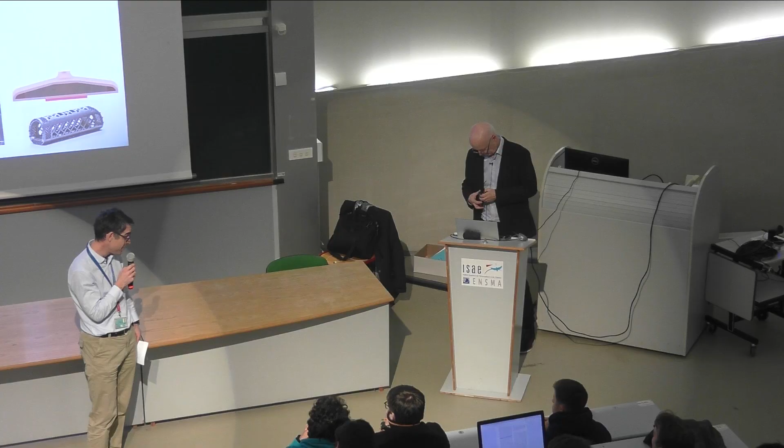As Maggie said, this is the second conference we have in English. The first one was organized by someone also in this community of high temperature materials working at GE Additive and now Colibrium. And first of all, I'd like to introduce Professor Roger Reed.

So Roger Reed did a PhD on steels at the University of Cambridge with Professor Bhadeshia, who is very famous in that field. And then he has been appointed at Imperial College before moving to the University of Cambridge as an associate professor. And then he left for 4 years to the University of British Columbia in Vancouver, came back in UK as a full professor in Cambridge again, then moved to Birmingham as a professor, and then to

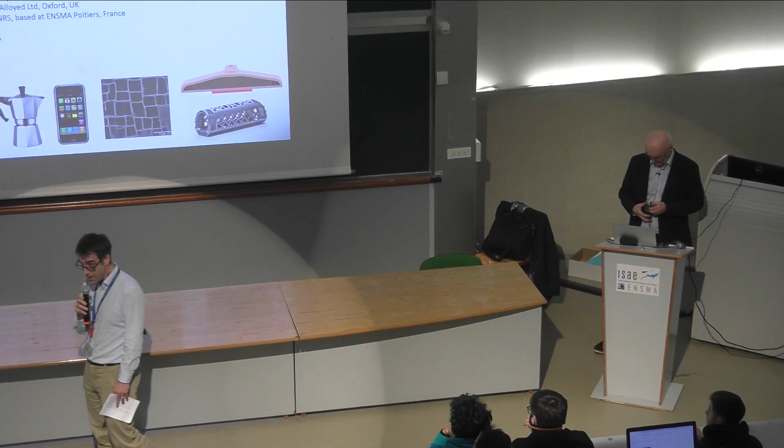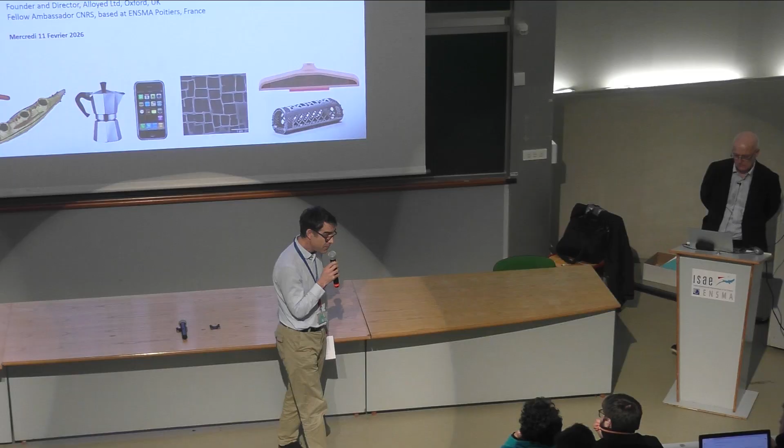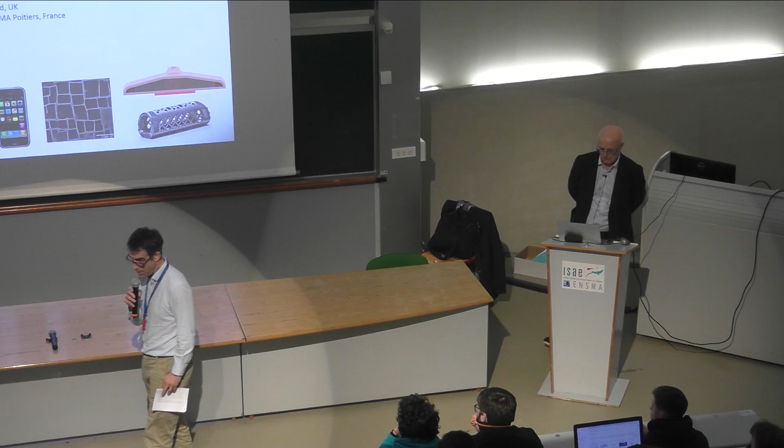Oxford. And more importantly, he has been appointed as a fellow of the Royal Academy of Engineering in 2017. And since 2023, he is also the chief officer of the high temperature laboratory in the University of Birmingham. So it means that he has a joint appointment between the University of Oxford and the University of Birmingham.

And last but not least, recently Professor Roger Reed has been elected as the CNRS Fellow Ambassador attached to our group at ENSMA, for the next 2.5 years. So it's a great honor, very few of them. If you look at the CNRS Fellow Ambassadors, some of them have received a Nobel Prize, just to tell you the importance of such a prize. So it's a great privilege.

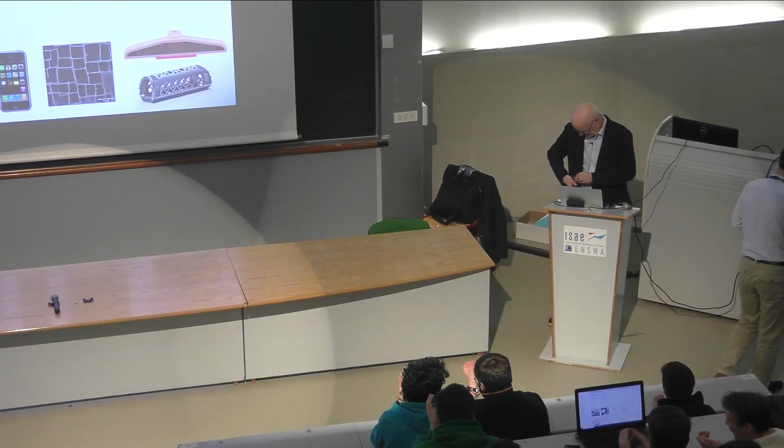So it's a great pleasure to be here, and seeing so many young people makes me very jealous, because I used to be young once, and I'm not young anymore. I used to be the future, but the future is you. So hopefully I can try to inspire you a little bit about this field today. So thank you, Jonathan, for the very nice introduction, and I hope you can hear me. Actually, I was warned that the acoustics in your beautiful theatre is very good. So if you whisper at the back, apparently I can hear you down here. So please be very careful at the back.

Okay, so just some biographical details, and the main point I want to get across here actually is that we in the universities need to collaborate very strongly with the big companies in this field, because we don't make jet engines or space rockets and so forth. So having the collaboration with big companies such as Safran, Siemens and Rolls-Royce, and also the material suppliers you can see listed here, is very important.

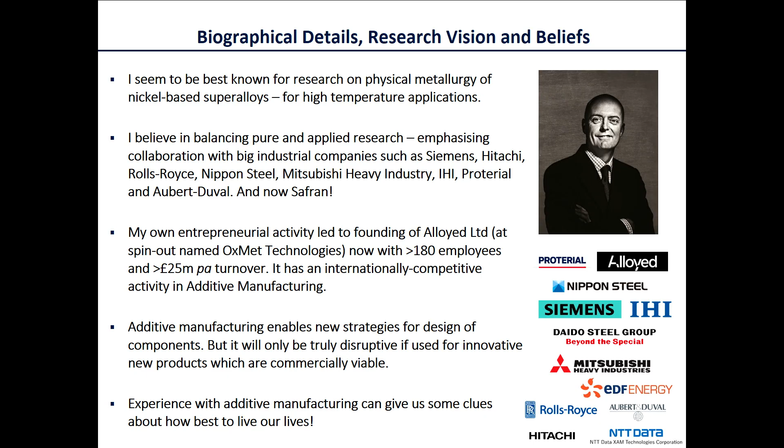And so people like Professor Cormier and others are making giant efforts to work with those companies and to collaborate with them. Sometimes we also have to be a bit entrepreneurial, which means that we have to think about setting up our own company where there is space for doing this. I set up about 10 years ago a company to do work specifically in the area of additive manufacturing, what we call 3D printing. So I'll say something about this in my talk as well.

So this slide here tries to inspire you to think about metallurgy, and really you can see here that it underpins nearly all aspects of commercial enterprise, energy production, conversion, and so forth. And so you can see here I make some claims about the fraction of all of the manufacturing inputs or values in Europe; it's a very significant amount of money.

And of course, all of the people around the world seek economic growth. And it seems to me that one of the big challenges is to find new kinds of metallic products that can allow this economic growth to occur, because we really want to have prosperity in the world. But yet we also have a problem because the production of metals contributes in many ways to global energy consumption. A lot of metals and minerals are being mined, which can, of course, lead to waste products.

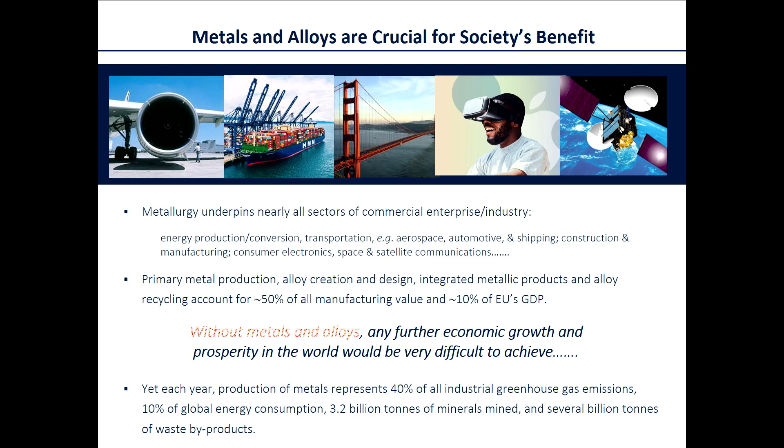Of course, this is another side of the story, which I don't really have time to talk about today, but it shouldn't be forgotten about when we talk about this field.

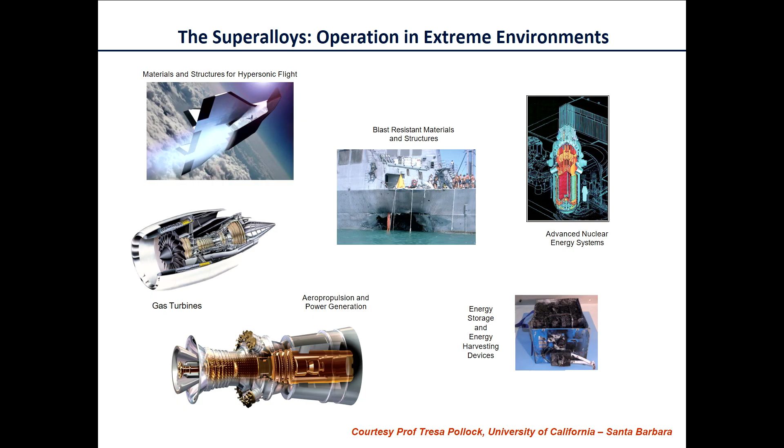The overarching questions in my career that have really motivated me concern, of course, the superalloys, which you can see are at the back of the engine here, at the very hottest part in the combustion chamber and beyond the back of the engine. And what we have to try to think about is designing alloys that can work well in those environments.

I've also been quite concerned with trying to find good manufacturing processes to put these components into practice, particularly using numerical modeling. When I started my career 30 years ago, we had very, very small computers, and I remember having only about 1 megabyte of memory on my PC to do all of my work. And it was really difficult to swap the memory in and out of what I had available.

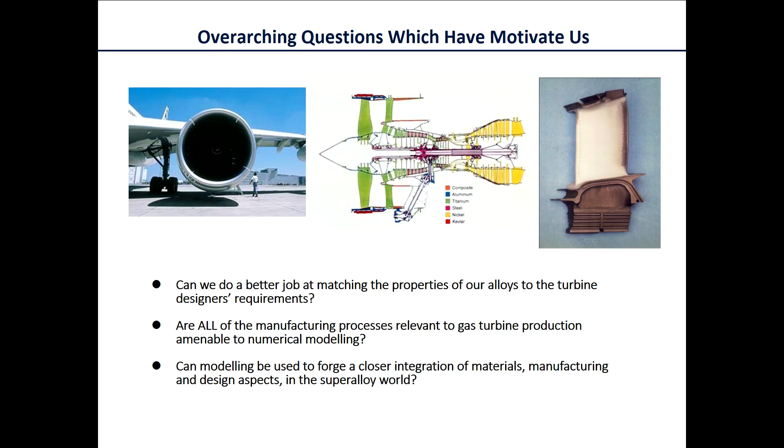But I'll try to show you that it's been possible to model many of the manufacturing processes. And of course, what is also happening is that we're trying to find a way to integrate the materials aspects, the manufacturing and the design in this world.

And so you can see here that just from a simple thought experiment, it's not easy to optimize these materials by trial and error. We need to have some kind of analysis method to optimize the materials. So I'm going to try to say something about that also in my lecture today.

But I'm going to start by telling you about some of the manufacturing processes which are used for these sorts of materials. I understand that not all of you are manufacturing engineers, but often we cast these materials into single crystal form, and this is done typically using a seed and a grain selector here, a helical selector. And then we have a ceramic mold which is withdrawn gradually from a furnace here.

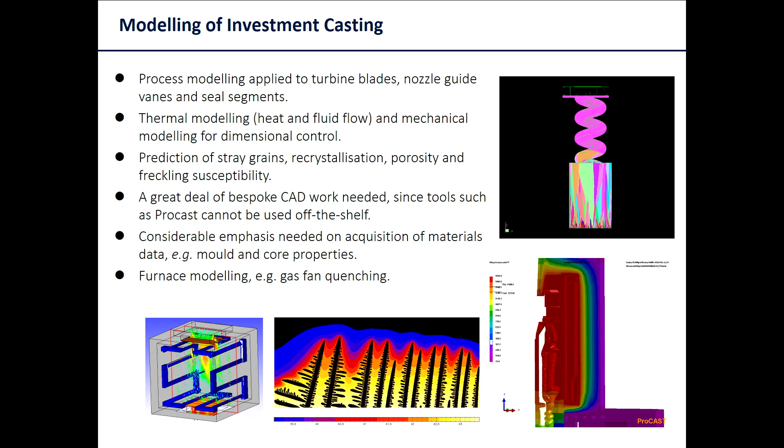We have a dendritic structure which is grown, and typically we also need to heat treat the material after it's been cast. So these are examples of computer models designed by my group over many years, but specifically with the idea of trying to make a digital twin for this sort of process.

Here's another example. We have turbine discs in the engine. Typically they are very heavy, maybe 100 kilograms in size. They're spinning around at maybe 10,000 revolutions per minute. Very big centrifugal stresses are set up. We have to machine these parts in a very intricate way from large pieces of metal.

And you can see here that the residual stress fields, which are typically inherited from the quenching operations, have a habit of redistributing as the material is machined away. So we were concerned with trying to understand how that residual stress field is redistributed as the material is chipped away.

And the reason why that's important is that those residual stress fields have to be accounted for in the lifing process for these components. They have to be taken account of in the estimate of the safe working life of the component. So precisely how we machine away the material becomes very important on the factory floor.

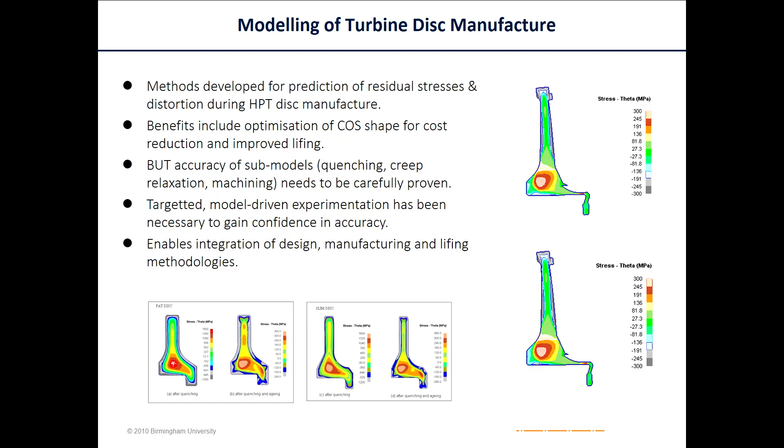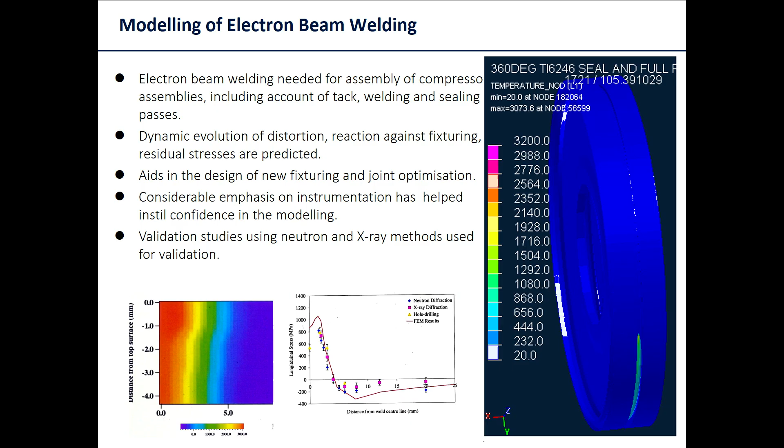Here's another example. These are compressor assemblies which contain the compressor blades, which allow the air to get squashed in the engine. And these are typically welded together. And of course, the action of the heat source, here an electron beam, as it passes around the disk, breaks the symmetry of the operation. So the stresses and the distortions which happen in that manufacturing process using electron beams have to be accounted for, because we want to have the distortion captured.

Here's another example. We want to try to find new ways of designing discs and blades because, of course, we want to minimize weight. Traditionally, the industry has made very widespread usage of these so-called dovetail joints where we mechanically fixture the blade into the disc. This, of course, requires us to optimize for the metal around the dovetail joint, which can be very heavy. So you can see here that there's a lot of metal at the hub of the disc, which, of course, contributes to the weight of the structure.

So we try here to invent new kinds of friction processes involving rubbing together metal, making a friction joint, which allows us to build lightweight structures for these sorts of applications.

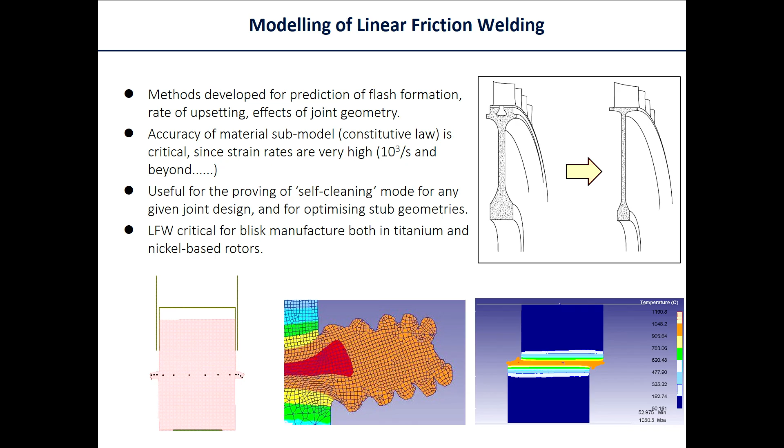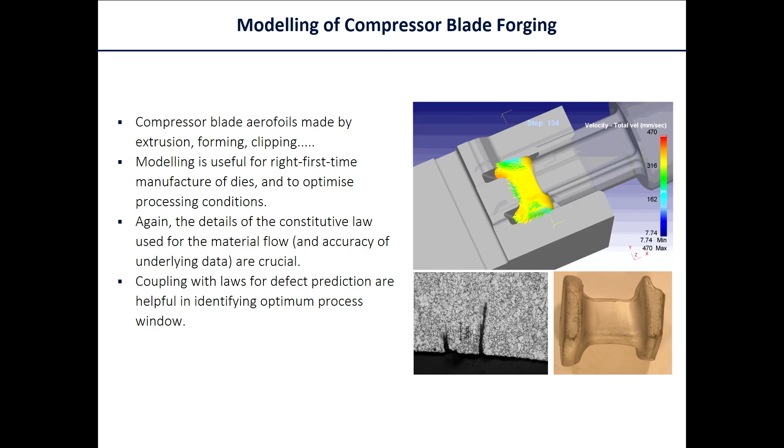Forging is also important in this field. So if you think about metal, we often want to form it into a particular shape. Here's an example of a preform for a compressor blade being made by pressing it into a die. Here, there is a risk of thermomechanical forces leading to cracking, and we want to anticipate in manufacturing whether this kind of thing can occur so that we can try very hard to avoid it.

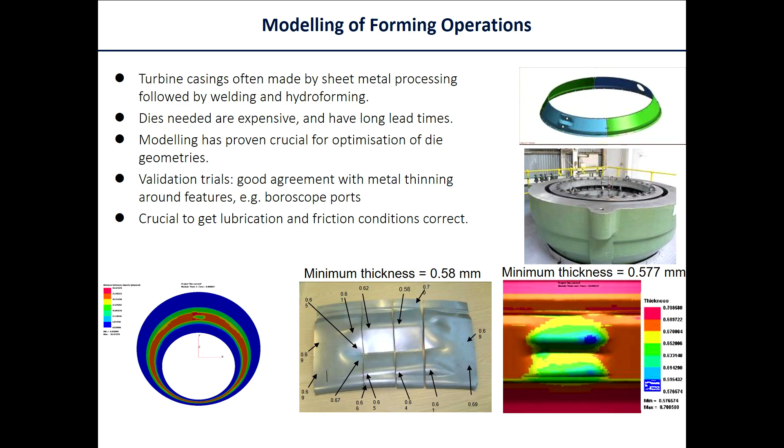We often have sheet metal forming processes too. These can be very expensive in terms of not just money, but also in terms of the time scale associated with designing the dies. In this industry, typically you may have to wait between 6 months and 12 months for the delivery of a new die, which has to be very carefully machined. And we want to try to avoid many trial and error iterations and get to a right first time philosophy for this kind of stamping operation.

Okay, so I hope in the first part of my lecture there I've given you a flavor for the kind of materials and also the kind of manufacturing processes which are used in this kind of industry. I'm working most of the time at the University of Oxford, and in my laboratory at that university we emphasize 4 key pillars of research.

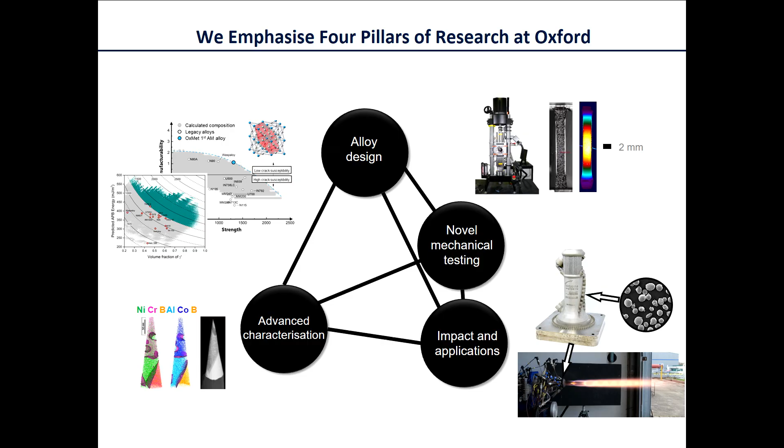We like to do advanced characterization. We try to design new alloys. We try to come up with novel methods for testing, particularly the mechanical performance of these materials. Very similar to the work which is going on in ENSMA, if I must say, at a much higher level and with greater impact. Then, of course, we're always interested in applications in this field. We want to try to find ways to make our research impactful.

Here's one example. In my experience, it's really important to work closely with companies, but also to have good concepts. Here's a nice example of a collaboration we have had over many years with the Siemens company. The Siemens company is one of the biggest companies for making land-based turbine systems for power generation, typically building machines generating maybe 50 megawatts of power.

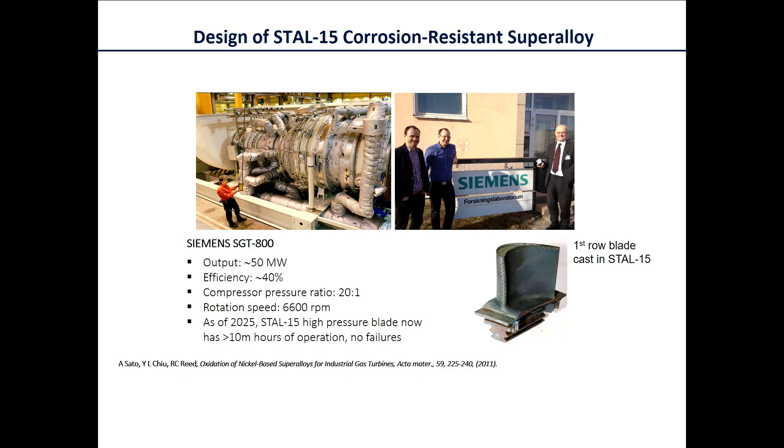And typically in this field here, these single crystal materials tend to corrode very rapidly at high temperatures. So the temperature of the hot gas may be as high as maybe 1500 Kelvin, maybe even up to 2000 Kelvin in some advanced aero engines. And so there's a risk, of course, that the blades here will corrode over time.

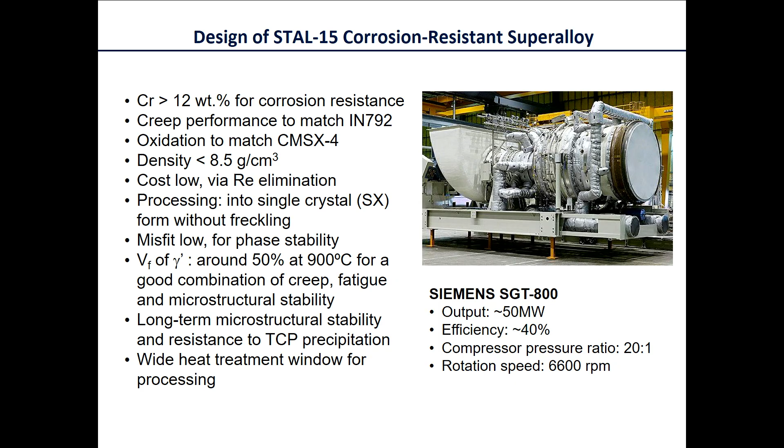And so we had an idea here of trying to invent a new type of material that would have superior corrosion resistance. The idea actually was to try to come up with a kind of stainless version of the superalloys. And the idea here was to have a chromium content equivalent to that of a stainless steel, greater than about maybe 12% by weight, so that we would have some very good corrosion resistance.

Now, this is a composition that we ended up designing here, but the key point of this analysis was to realize that the two phases which are really relevant to these materials, the gamma matrix and the gamma prime precipitating phase, have got different propensities for dissolving chromium. So by modifying the amount of the gamma prime forming phase, we were able to push up the net chromium content of the alloy towards higher levels. And in this particular case, it was this concept which is really important.

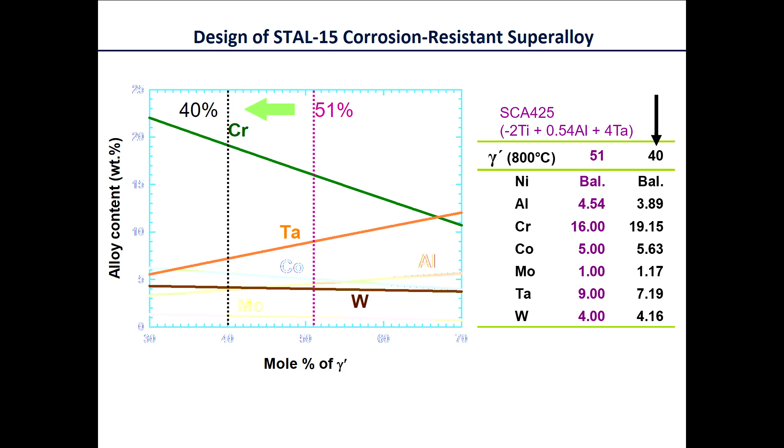And that's why I actually like collaborating with the French people. You have very strong concepts, very strong flair for design. And this is the key point that came from this particular research.

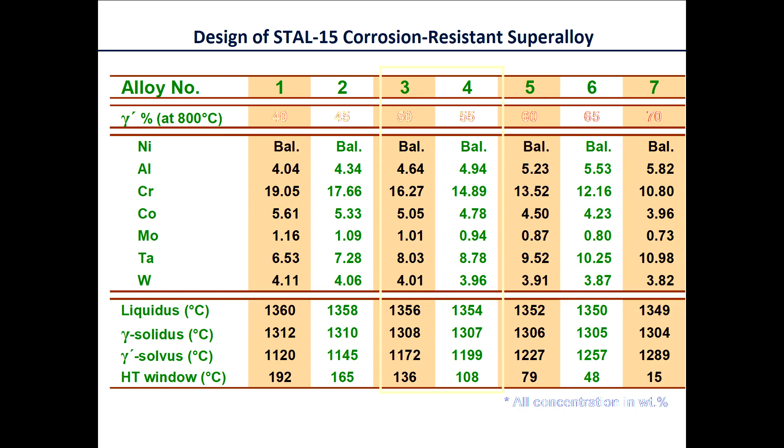And you can see here, taken from maybe 15 years ago, different trial compositions that we came up with on the computer with this idea of the digital twin, modifying the fraction of the phase and its compositions predicted by our thermodynamic databases.

And you can also see here from so-called thermogravimetric oxidation tests that this new alloy, which had the code name STAL15, STAL stands for Siemens turbine alloy, has very good performance in oxidation. So under mass gain trials at temperature, you can see it has very low rate of mass gain because its oxidation reaction is very, very slow.

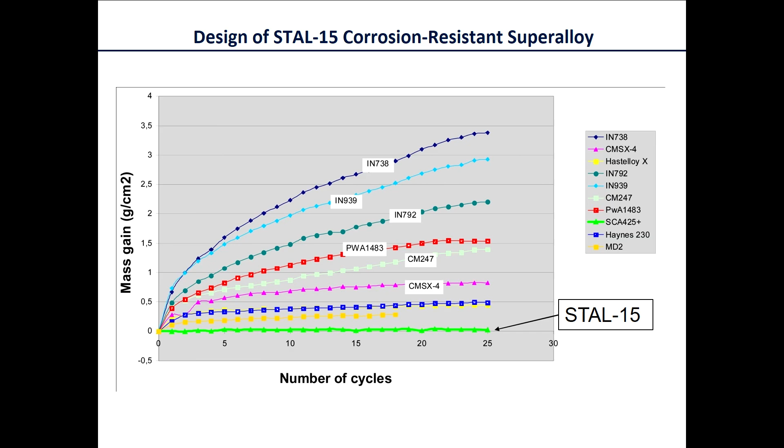Sometimes when we do these kind of projects, one of the beautiful things about science is that many, many things arise which we didn't really think were going to happen. So I can say with great confidence that we have been able to come up with really novel science too.

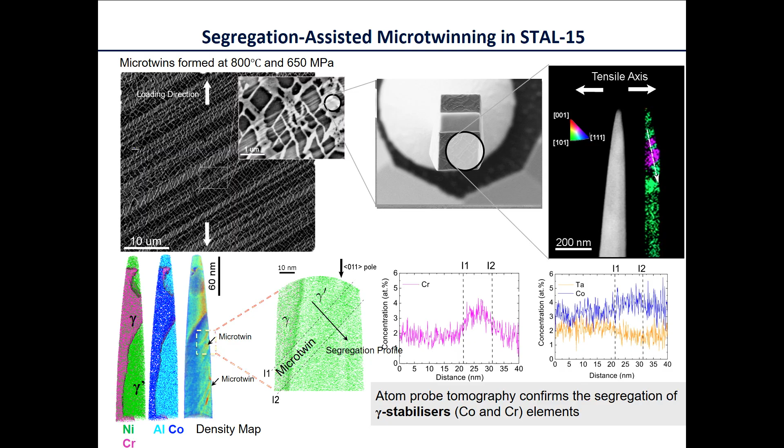These are microstructures of the deformation characteristics of this new alloy, in which we found a very special kind of twinning mechanism here, which involved us needing to take needles of the material and then stripping off the ions one by one to identify atom probe maps here, which we could then interpret for evidence of this so-called micro-twinning. I'll say more about this very neat technique later on in my presentation.

Now, around about this time, when we were doing this work, we had the idea of trying to build large databases of conceptual chemistries of these materials and to relate each of those chemistries to the properties of the alloy. Bear in mind that conventionally, up until that point, people had been, by trial and error, so-called bucket chemistry, inventing new alloys, testing the properties and ranking them to see which was best.

We decided we wanted to try to do better than this, and that process involved making many, many calculations on the computer and identifying these kind of ISO fronts here, which will allow us to optimize the composition of the alloy based on merit indices and design criteria to eliminate unsuitable compositions.

This was a really nice thing which we did, I think, in retrospect, and we termed this method an alloys by design approach, because we wanted to be able to design alloys for their properties in just the same way, for example, that polymer chemists are able to design new kinds of polymer materials on the computer quite routinely.

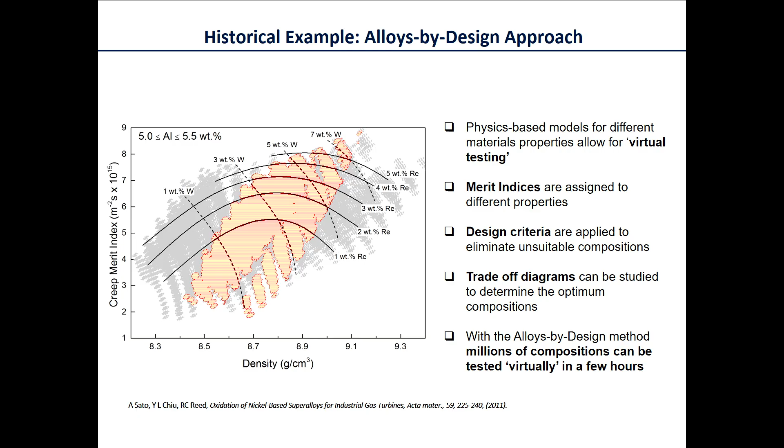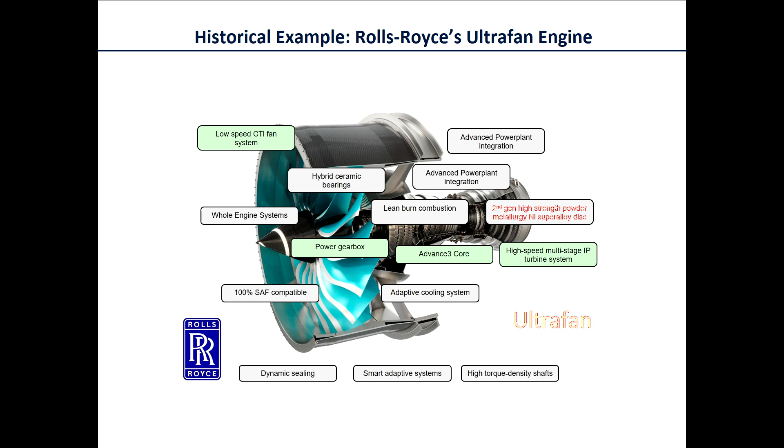And you can see the kind of technologies, I won't read them all out, that they believe to be important for a next generation UltraFan engine. And at the back here, you can see a new second generation high strength powder metallurgy disc that was designed by my group, and again, patented, as these things have to be.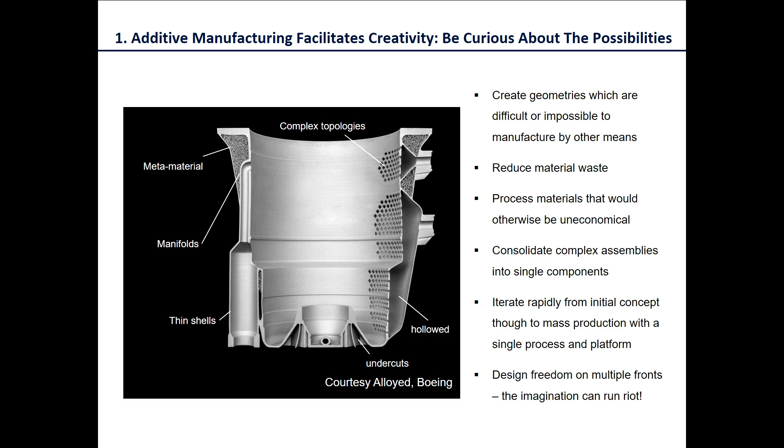Yes, so for those of you who maybe are unaware about what additive manufacturing involves, we have a powder, and we spread this onto a base here. Then we use a laser beam to locally write the structure that we need to have in solid metal. Then we repeat that process over and over again. Typically, the thickness is about that of a human hair, maybe about 50 microns.

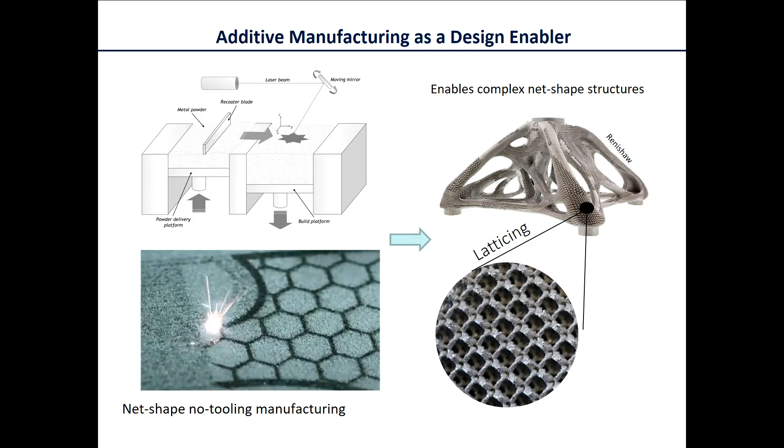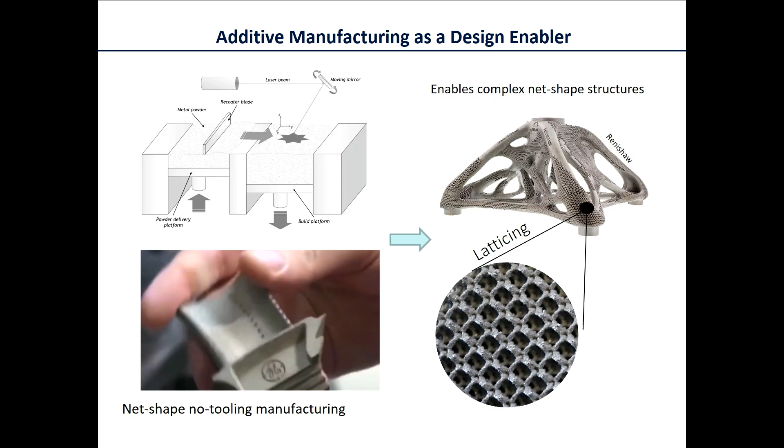And providing we have an accurate digital file that we start with, and we know where to place the laser beam, and we can make good decisions about that, we can build up these very complicated structures here by solidifying the metal locally using the laser beam. So that's what additive manufacturing actually is. And what this taught me is just think about what the possibilities are. While you're out walking or running or cycling, whatever you are doing, open your eyes and just think about what we could do with new sorts of structures.

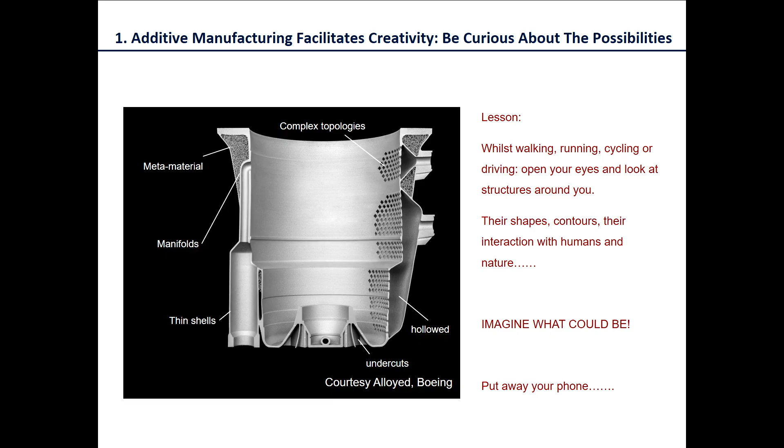What this has taught me actually is that design is very, very important. So how we integrate structure, properties, modeling, and processing is very, very important. Now, I work most of the time actually at the University of Oxford, and we have some pretty clever students, but actually they're not really as clever as the people in France, I've discovered. I have this kind of thing in England about trying to ask people what they think they mean by design.

And I usually start by asking, is the word design a verb? En français, un verbe? Oui? Comme ça? Oui? Or a noun? Now I show my ignorance of French. What is the French word for noun? It's the same thing, the même chose. Oui. Maybe I do know French after all. So is it a noun or a verb? And the answer actually is both. It's both. This is maybe the origin of the confusion, right?

Because we have design indicating a concept, as in good design, functional, beautiful, so forth. What I think is the most important aspect, though, is actually doing design. And doing is un verbe, en français. And so we can think about the action of doing verbs. But then we also have to think about design meaning a concept, meaning a kind of prototype. Sometimes we are using the word design to mean this.

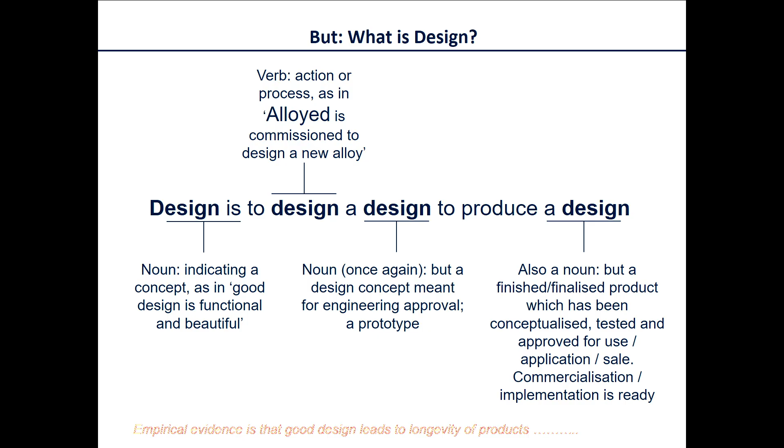But then lastly, also, we can think about design meaning a final product, which has been designed, it's gone through the prototyping phase, and we have a final product that we can sell to the market. So we say design is to design a design to produce a design. And this is here really to make you think about what we know to be design. And of course, what you realize if you think about design is that good designs really are long-lasting.

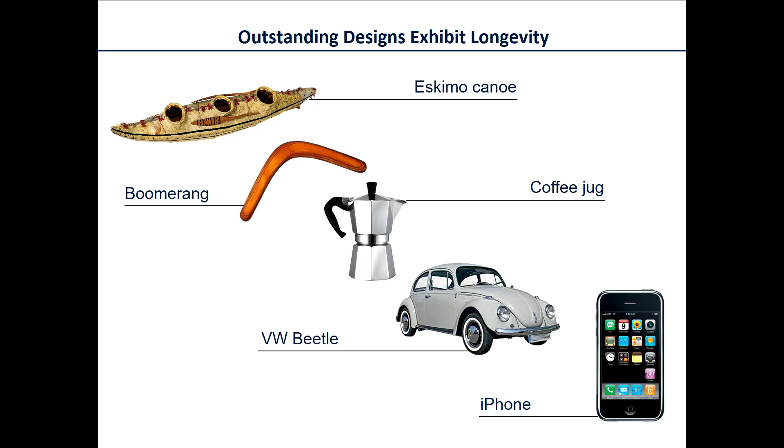So for example, the concept of a canoe or a kayak, the basic design hasn't changed for thousands and thousands of years. The boomerang, again, a good design. This kind of coffee jug, you can still buy these sorts of things. They're nice. This basic structure is the same. And even the iPhone that I implore you to put away, basic design hasn't changed for about, I think, 20 years maybe, which is an amazing thing. You know, in the world of consumer electronics, a basic design that hasn't changed much.

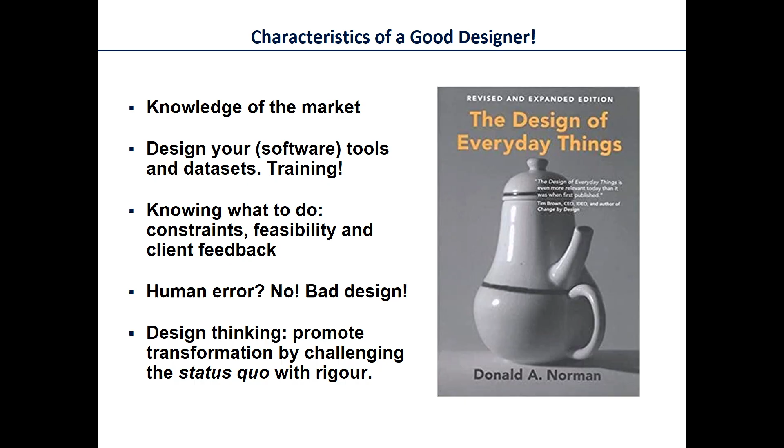So think about being a good designer, knowledge of your market, designing your software tools. Think about human error. Well, is it human error or is it just bad design? I like to promote design thinking, and these books here are ones which have really influenced me in reading them. So I thoroughly recommend these.

Okay, so a second concept for you to think about: I think finding ways to improve your observational capacity, or your spatial resolution, or the depth of field for your measurements. In my career, this has been very important.

Here's some example. We think about how to test the material here by a test piece. Does this really have to conform to a standard? Or do we in a lab maybe want to try to change the design? Or do we want to maybe think about moving from a classical extensometer to a vision-based system? Maybe we need to measure the temperature not just with a thermocouple, but maybe also with an infrared camera.

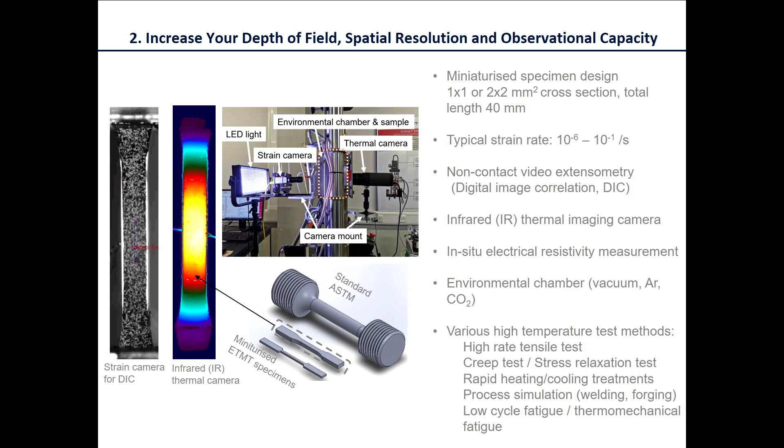There's these days lots and lots of ways that we can find and store digital data about the way our materials behave. Here's one example. Don't be afraid to try to do things differently. Here we had the idea of building a brand new furnace with windows that would allow us to have access to the specimen, but from many, many different sides.

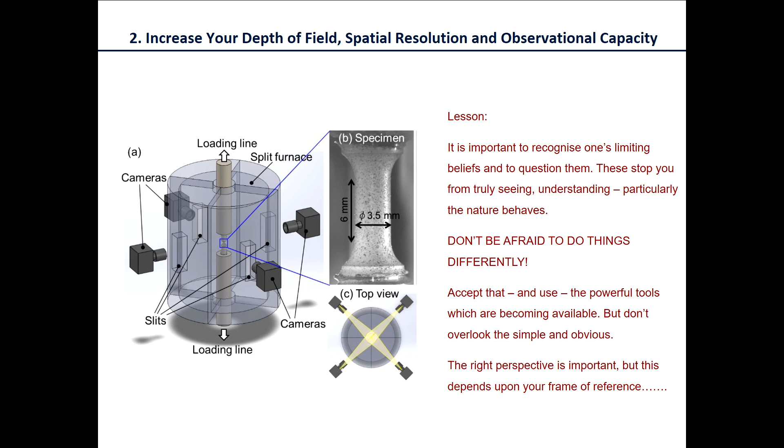Because some of these materials are deforming anisotropically, which means that they tend to move out of plane. And we wanted to have a much better map of what the surface is doing. Here, the perspective ended up being very, very important. And you can see here that when we test the material from 4 different angles, or we measure the deformation, the perspective that we have here is very different depending on which camera we use, even though it's exactly the same test.

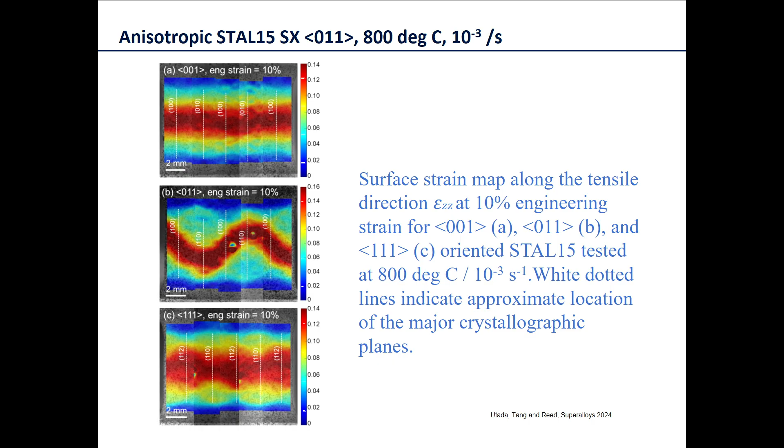So what this teaches me anyway is that the perspective depends very much upon your vantage point. And you can see from these sorts of measurements that we were able to map the surface strains as a function of the circumference of the material for different orientations of this particular material. And I credit Mr. Utada, who worked very nicely in Jonathan's lab for these very excellent measurements in Oxford.

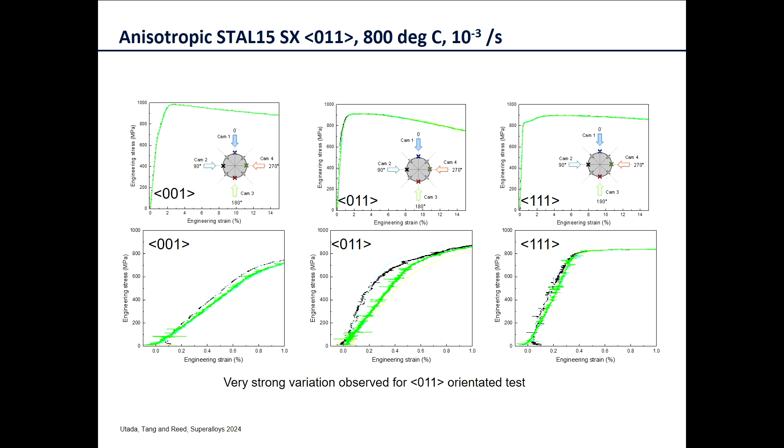And you can see here that actually the stress-strain behavior in the limit here is very much dependent upon the camera that we use. And this is due to the elastic and the plastic anisotropy of this material and its underlying deformation mechanisms.

Here's another example fresh off of the press. I think these measurements were only made last week in my laboratory. You can see here that this is a stress-strain curve. This is actually a rectangular cross-section. And with the camera-based systems, you can see the strain here. You can actually see the strain banding. I'll show it again. You can see here the strain banding occurring in this material over time.

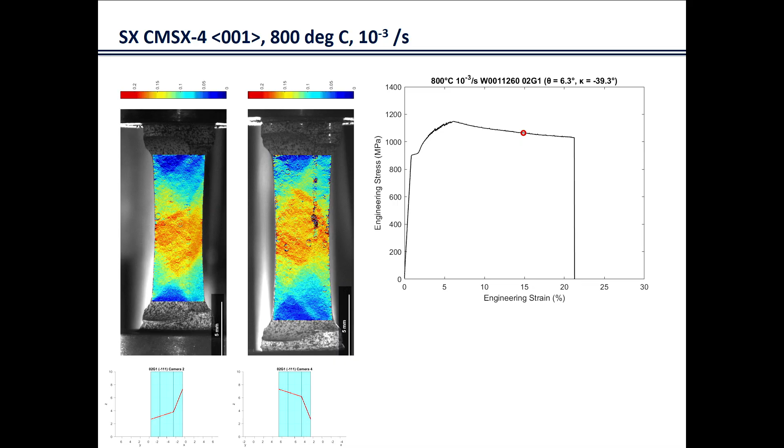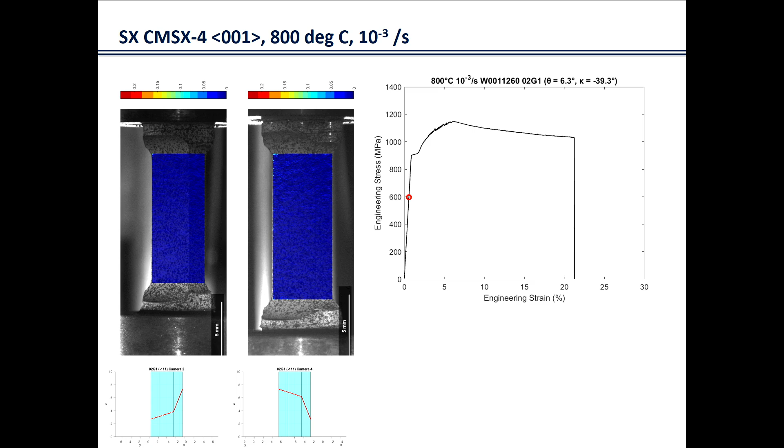So the plastic deformation is clearly not isotropic. There are certain planes on which this material actually is deforming preferentially. So we're able now, I think, in this field to capture a lot more data. And how you young people deal with this data for calibrating and building new kinds of models with greater fidelity, I predict these things are going to be very important moving forward.

Now, I said to you that we had placed emphasis on designing new kinds of materials for the additive manufacturing process. And here's some justification why this is important. If you look at this field, then in the 1950s, history tells you that we learned how to cast these materials in a vacuum. That was very important because they're very reactive, of course. So vacuum systems came along. We learned how to atomize the powder and then consolidate it. And then in the mid-1990s, additive manufacturing came along. Every time these new processes have come along, new kinds of alloy have been invented.

So there's a kind of lesson here in life. I hope you don't mind me trying to impart some of my feelings about this. What I have discovered in my life is that it's very critical to decide where and when to start a new piece of work. You can be late, you can be early, but getting it right in terms of its time is very important. We always need to be inspired or to be excited, to be creative. It could just be personal work, your own kind of way of doing things. It could be a patent. You need to write a paper at the right kind of time.

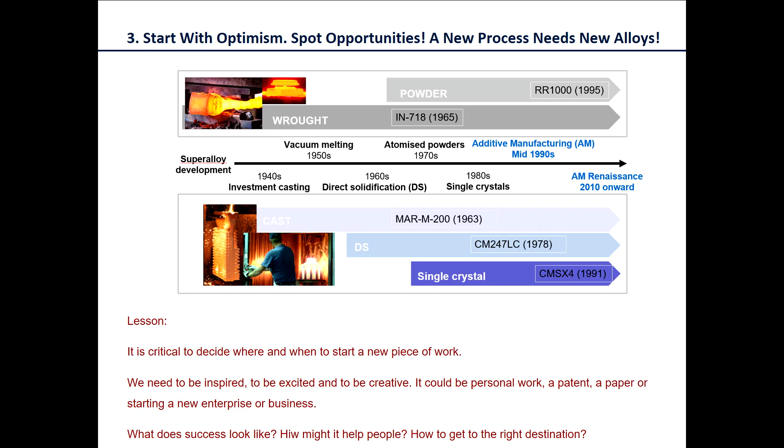Think about, what does success look like? Finishing your slide today and showing it to me before I go home, right? Please do it. How to get to the right destination.

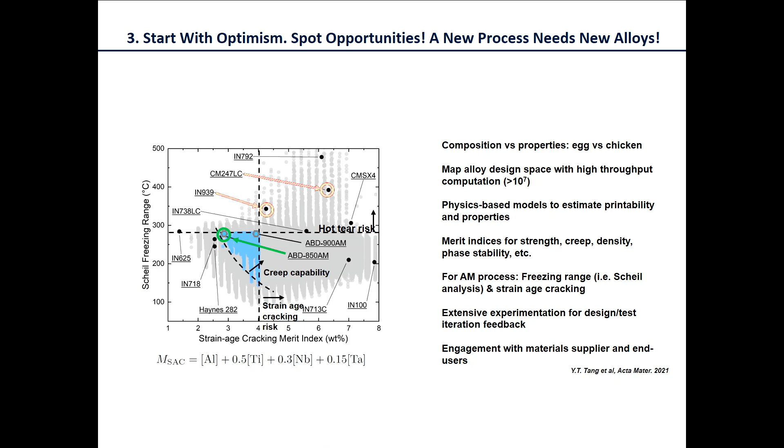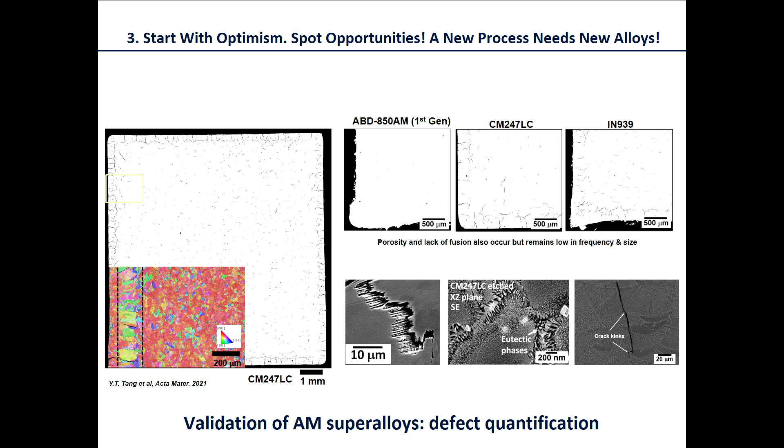And Professor Tang did this work for his PhD and postdoctoral work. And you can see from these slides here, these are typical coupons for additive manufacturing material. This is the first generation alloy that we designed. And you can see here, right first time with these concepts, we were able to design something that actually performs better under identical tests than the existing alloys, which do crack under these circumstances. So this gave us great confidence in what we were doing with regard to designing new kinds of materials.

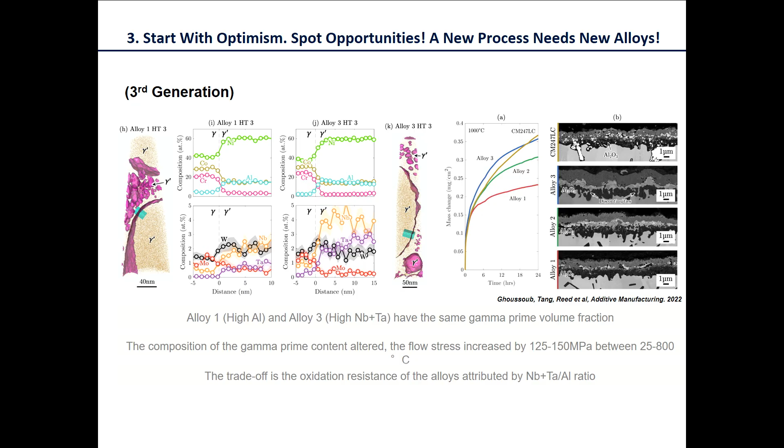We have also spent a lot of time collaborating with people. This hopefully will come across in my presentation. These are examples of atom probe maps where we are stripping away the atoms one by one and working out where they sit in the microstructure. I'll show you how we do this in a minute. But you can see here typical microstructures, predictions for the gamma-gamma prime equilibrium, and tests done of the oxidation resistance of these new alloys in this way.

In Oxford, what we do with the atom probe, actually I should say, most of this technology was invented in France, in Rouen, with Professor Blavette. The Oxford people are just kind of copying what the French people discovered. But we make a tip here, and we make this very sharp, and then we strip away the ions one by one and pass them through a time-of-flight mass spectrometer to identify which species that ion corresponds to, whether it's chromium, nickel, aluminium, and so forth.

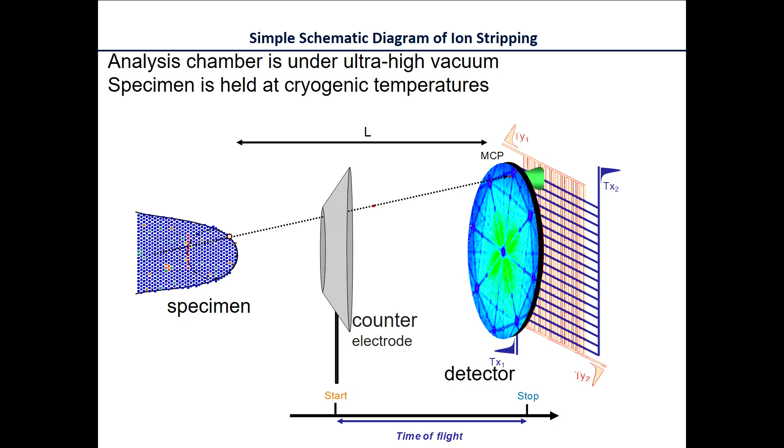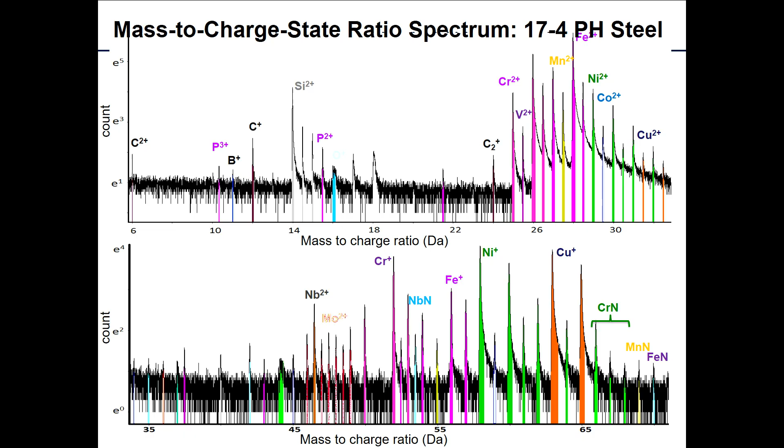Typically, what's done for the three-dimensional reconstruction is to have a counter electrode. We have also a gate here, a detector, and we measure the time of flight. And from the mass to charge ratio, we can work out which ion has been stripped away one by one. And these days, it's quite possible to build up maps of maybe 100 million atoms using this kind of technology. Here's an example of a typical spectrum that you derive in that way. And you can see that each peak here has to be indexed with software for determining which ion is which.

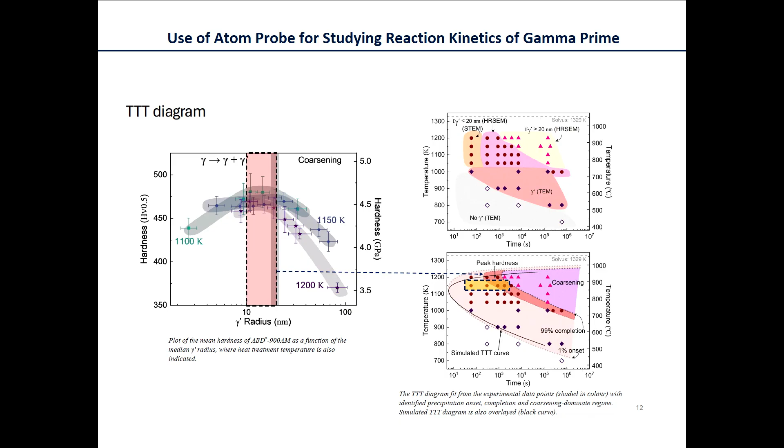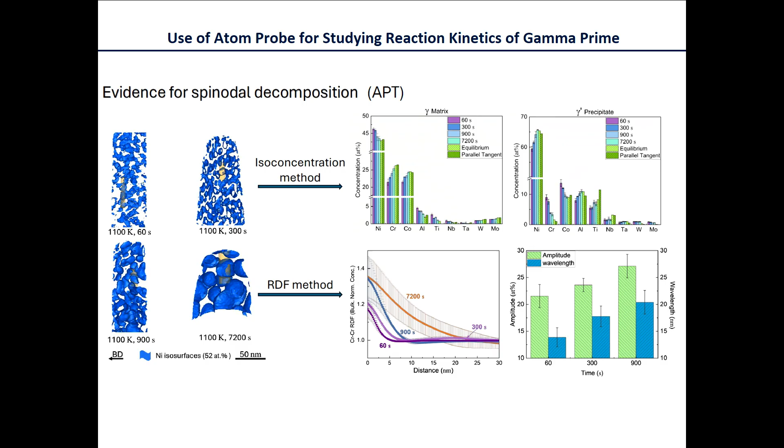We've been using this kind of technology for studying the reaction kinetics of the superalloys by the so-called time-temperature transformation diagrams. This is the work of Yuhan Zhuge in my lab, and he will present at the European Superalloys Conference these TTT diagrams here, where he's trying to understand the mechanism of transformation for this reaction. And you can see here with the three-dimensional atom probe maps, he's able to show that the amplitude and wavelength associated with the decomposition reaction appears to be consistent with the spinodal type of phenomenon.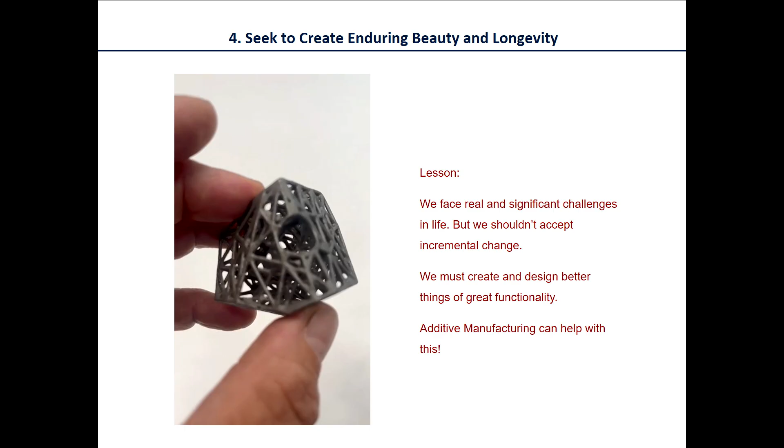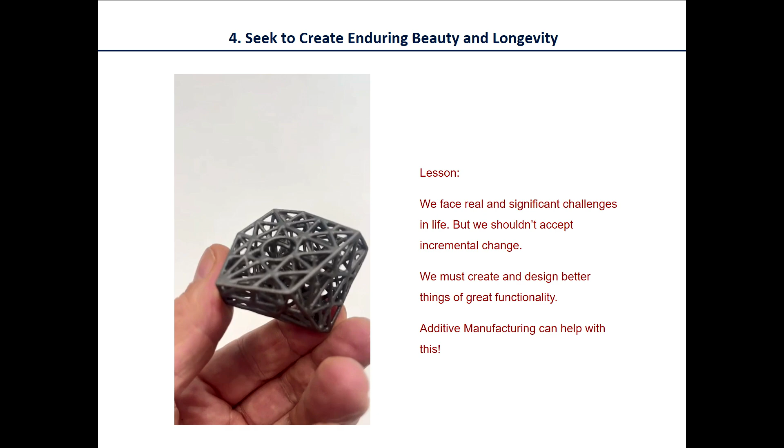Okay, next. This is a hollow structure. I think we should, as engineers, try to create structures of enduring beauty. We face really significant challenges in life. We had the idea of thinking about hollow structures. Why? Because, of course, for 3D printing, we are reducing the cost of the material. We can lightweight. We can add additional functionality.

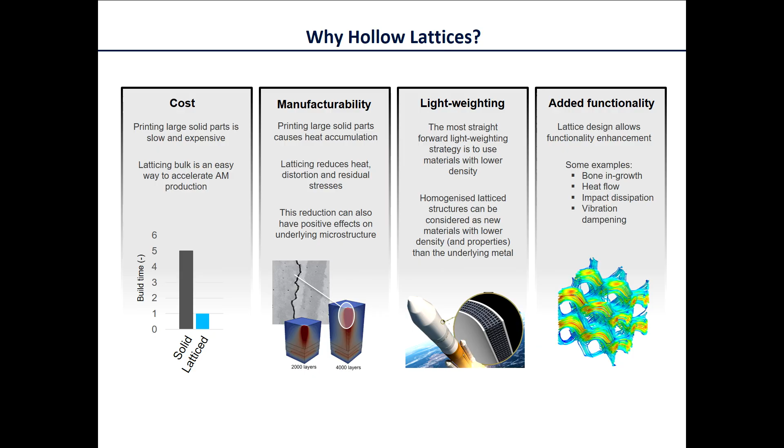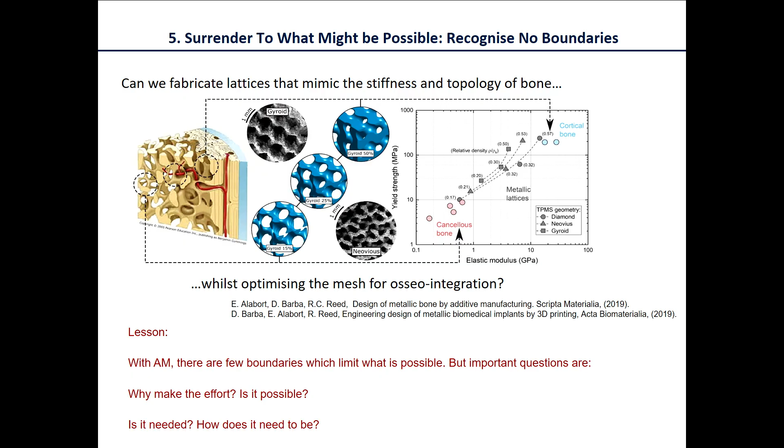The basic concept here was to think about how we could remove one of the Achilles heels of metals. Metals typically tend to be very heavy with regard to their mass relative to water. Titanium has a density of about 4. Nickel alloy is typically about 8. We can make these ones lightweight here so that they can match the stiffness and the topology of bone. And this can be done using three-dimensional printing.

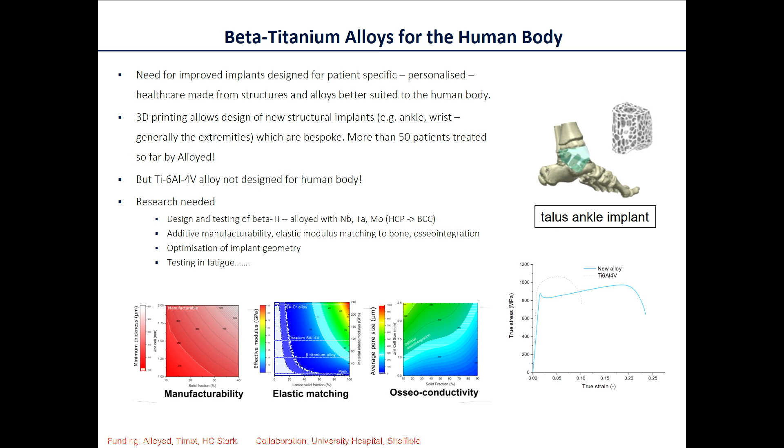Typically, these sorts of structures can be inserted into the humans. And the company that I set up has become an expert in doing these sorts of things. And you can see here, by using these sorts of ideas, new kinds of alloys for 3D printing structures that can go into the body has been happening.

Typically, with these sorts of design scenarios, you have to trade off ductility against stiffness. You can see here the new alloy has a much lower elastic modulus, but has good ductility. So for fatigue, it behaves really rather well. Okay, I think I'm running a bit out of time, so I'm going to just skip over these ones.

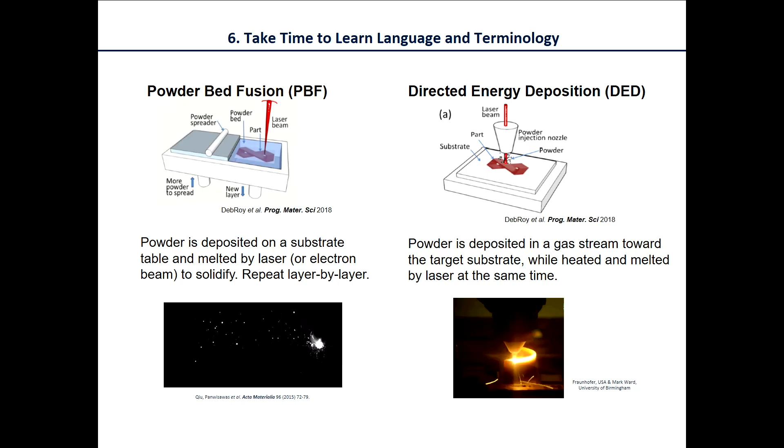A sixth lesson. Think about learning new language and terminology. This kind of thing is very important. I didn't really realize until later in life that we have to do this. New kinds of terminology. I remember being, in my younger days, the youngest person in the room. I'm no longer the youngest person in the room, usually the oldest.

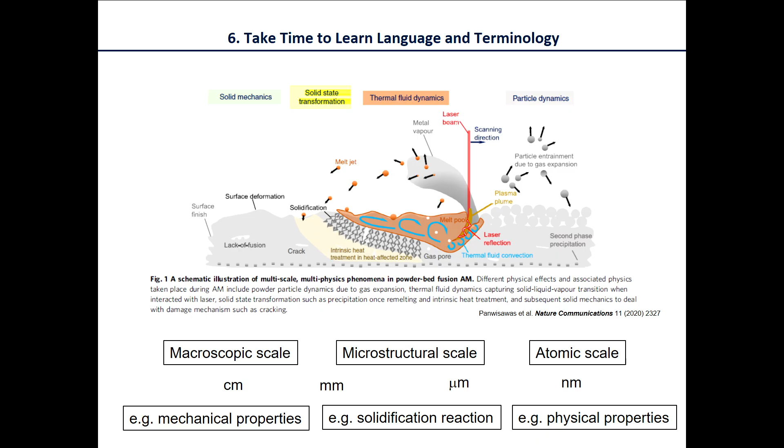But when I was young, all of the old engineers would be busy using this terminology that I really struggled to understand. And it took me a lot of time to get the confidence to learn all of the language so that I could communicate and collaborate with those people. So some advice from me with regard to this.

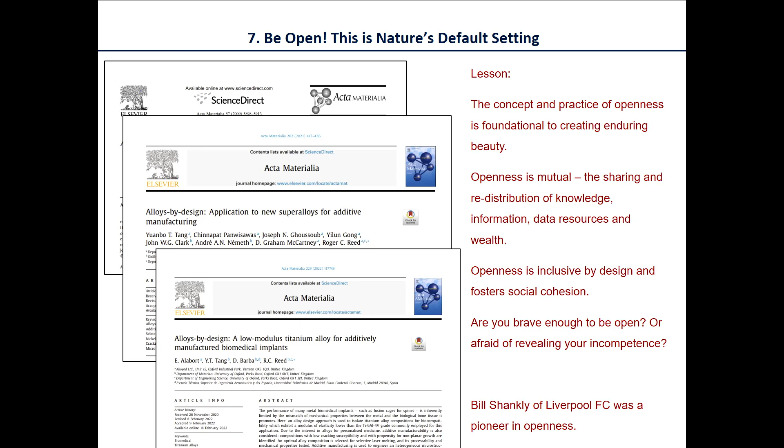Number 7, and Professor Cormier is very good at this. Be really open about what you are doing. I believe very strongly in openness. This is the foundation of creating beauty, because when you are open, you communicate your ideas, then of course you are redistributing knowledge and information. So publishing is very important. So the question is, are you brave enough to be open? I hope so. It's important.

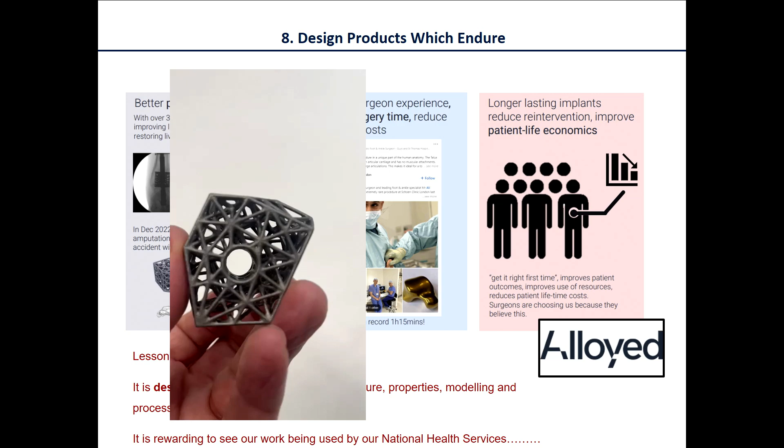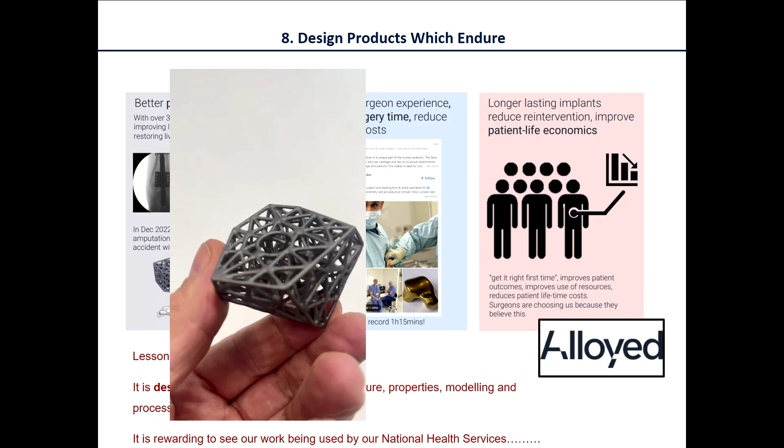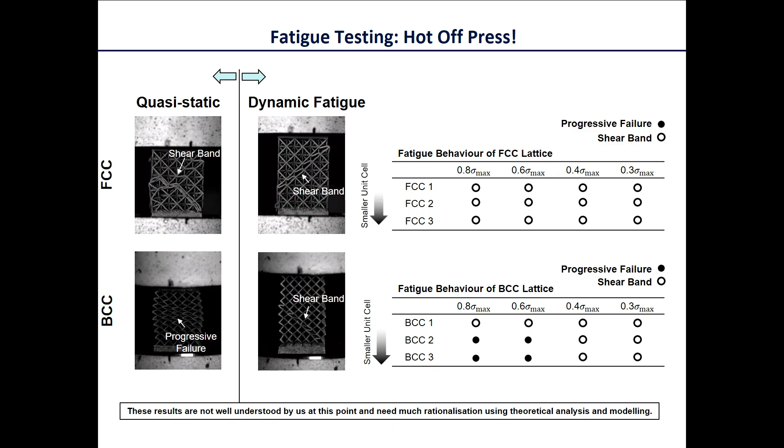New products inserted into the body, design products which endure. That's a typical component which goes into the heel bone for people who have smashed up their ankle by doing too much snowboarding in the Alps. So be careful. What we are doing currently in my lab is to try to get much better knowledge of the fatigue behaviour of these lattice type of structures. And this is, again, one area where I think we can do more and more.

Number 9, go and see people, because you are going to be inspired by them. Go meet people. Go to see companies. Surround yourself with people who inspire you. What inspires you about people who are around you? It could be their product design, their courage. Maybe they're just very good technically. Maybe they have a really, really good story to tell. Maybe they are just brave.

My tip in life is to work with the very best people you can. And if you do, you will be successful. And do it quickly, now. Write your conclusion slide. Because your life on the planet is short and you just never know what is happening.

Last, work collaboratively. The material which I talked about in this lecture actually was made by the fantastic company Aubert & Duval in Clermont-Ferrand, in the Massif Central. Actually, I have to say, I was arrogant enough to think that we could try to do all the things for the powder in our lab. I was completely wrong. Completely wrong.

Sometimes in life, I think you need to be aware of what your limitations are, because there probably are other people around who can help you with your work. So here we decided actually that we were much, much better off collaborating with the Aubert & Duval company than trying to do things ourselves. Sometimes in life, and especially in business, you need to be brave enough to realize what your limitations are and to find people who can really work with you.

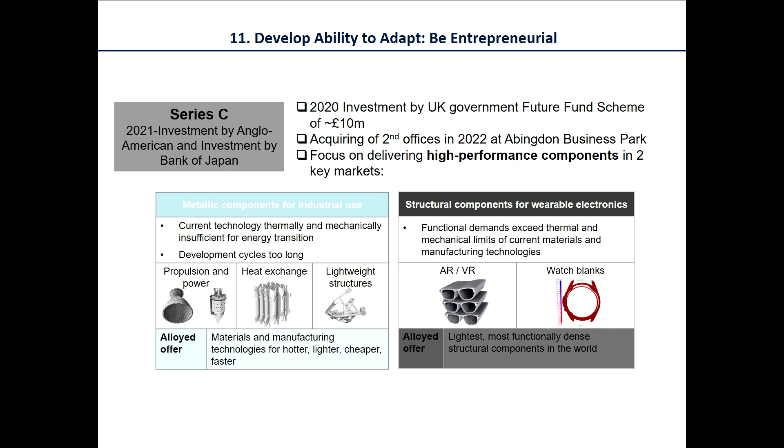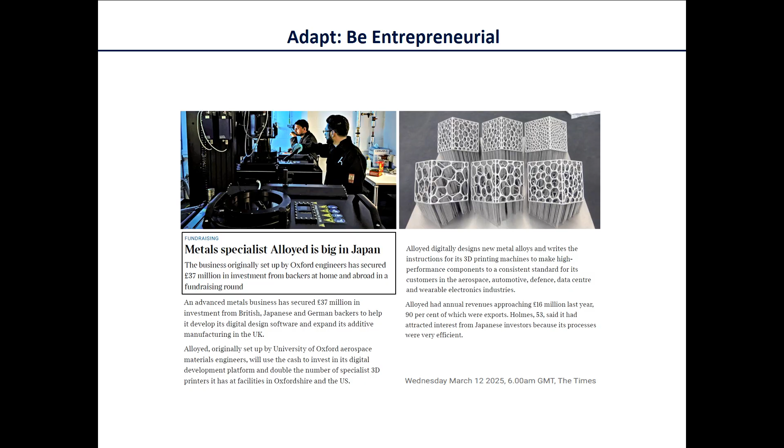And there's another example of the Alloyed company, so be entrepreneurial. These are the kind of things we are making with the new company, and it's been really nice to see that we have also recently made the press in the UK, in the Times of London. It's not the same as Figaro, is it, in France? And new kinds of micro engines for defense type applications. And we are now in the top 100 tech growing companies in the UK, so this is nice. Okay, the very last slide.

This might really surprise you, but every morning when I get up, I am a bit afraid about what I'm going to do at work. And I have found in my career that I have to confront my fears daily. I doubt myself. Can I do it? Is it right? Can I be enthusiastic enough?

I have to go to work and I have to inspire my research group. And if I am miserable with them, with myself, am I going to be able to do this? It's a real challenge. So you have to think about letting go of fear. Somehow, I come to this beautiful lecture theatre and it's amazing. But I still doubt myself. As I say here, I'm still afraid of failure and need to confront my fears daily.

This is easy to say and hard to do. My lesson: to have a chance of success, you have to let go of your fears and try things. This is a valuable lesson. Many people helped me in my career. Some of them are here. And this is my summary.

This is a fascinating field you're in. You're really lucky. Be curious. Increase your depth of field. Develop and have your ability to adapt. Don't stand still. Go and see people. This is really important. Be open. Publish your things. Work together, collaboratively. Start each day with optimism.